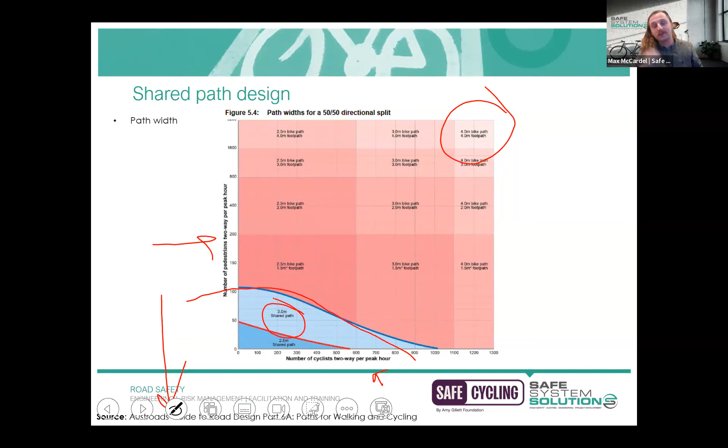Another way shared path width is often calculated - you may have come across this - is both within the Austroads design guides and a range of supplements for jurisdictions that recreate this. I should point out that because we have multiple jurisdictions in this course, we're not just focused on Victoria, Queensland or Western Australia. We've looked at the various supplements and additional guidance in each state, and taken snips from different jurisdictions, so you'll see how different jurisdictions manage things and what we'd consider best practice in that space - how others are managing certain aspects of the network.

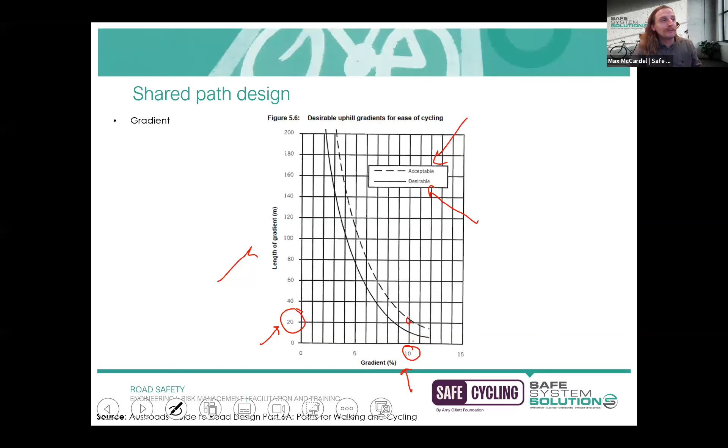Okay, fantastic, I can see lots of, yep, maximum speed, absolutely, no signage, give way, the conflict point right there at the bottom, handrails on the fence, absolutely. Oh, Julian's on, hello Julian.

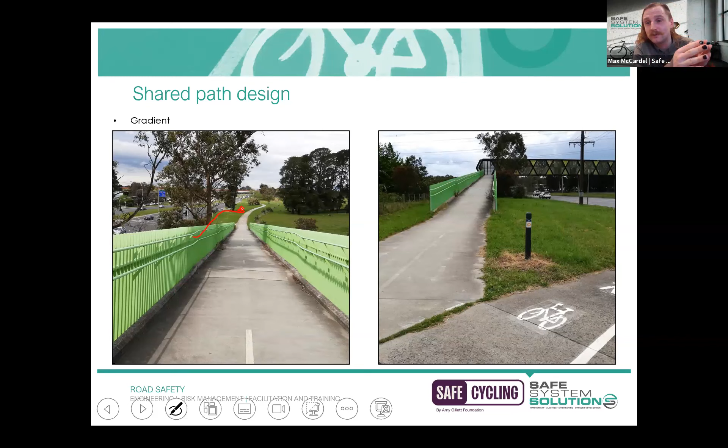We actually did an audit of this design and suggested we put the conflict point over here instead, where it's a lot clearer to see any other cyclists traveling in that adjacent trail, and also provide give way signage and things like that. That has since been installed. So something to consider, the Austroads guidance generally talks about the uphill grade, but also think about how cyclists are traveling downhill, and whether there are any obstructions or concerns during that downhill transition.

All right, when we talk about hazards on bicycle paths, the first thing we consider is, well, what is the operating width of our cyclist? We use a nice neat number of 1 meter. That's generally considered the operating width, the same terminology used for vehicles as well as heavy vehicles, that operating width being how much space they require. Cyclists have their own operating width, so we use 1 meter.

There is a little clause within Austroads which suggests if cyclists are traveling uphill, that operating width may actually be required to be widened. The reason being, cyclists traveling uphill tend to rock left and right, left and right, and that obviously increases that envelope. So whilst not specified just yet, I'd expect in the next revision of Austroads and additional supplements that we may see changes to that operating width. But for the time being, this 1 meter width is generally taken as the standard or the norm.

Importantly, we've got a head clearance that we need to be mindful of. We want to make sure cyclists have adequate clearance if they're going under underpasses, for instance, so they're not going to clip their heads. The height of a cyclist is taken as 2.2 meters, with a 200 mil head clearance, which is not a lot. But often if you are working within an underpass space, it can be a lot of money to dig further down or ensure that the superstructure is higher. So you may be bound by what is currently there, but those are the figures that are currently provided.

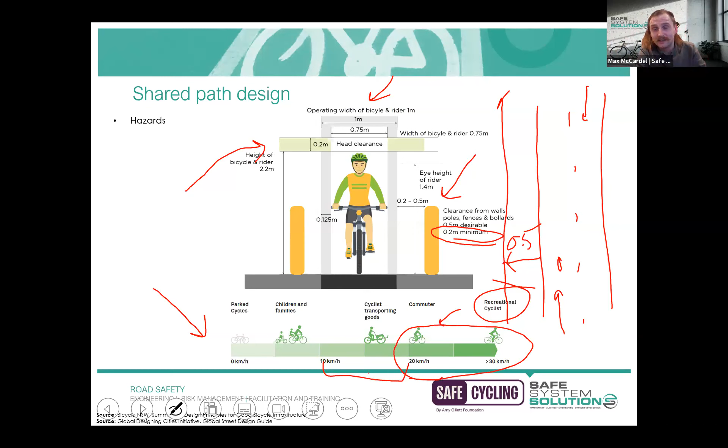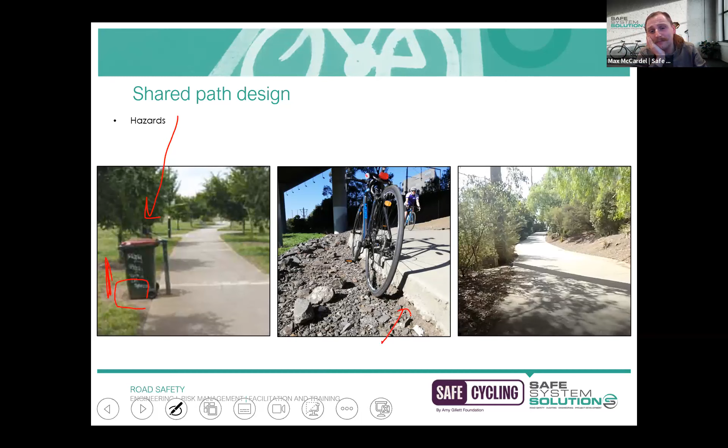Having little drop-offs adjacent to a shared path is also quite common. The way you'd mitigate that is you just want to ensure that whatever fill material you're using, you're battering all the way up to the surface level, not to the underside of the concrete shared path there.

The final example I've got here is a utility pole that's actually very well hidden by the vegetation there. The edge of the shared path is a bit difficult to see, but it runs about there. It's definitely within that half meter clearance, which means this does pose a risk for cyclists. Your handlebars could snag on that, and that risk is also accentuated due to that vegetation having a masking effect, not giving clear visibility to that hazard.

Loretta: Thanks, Max. I've just got a couple of questions that have come through. Go for it. Are we beginning to consider wider operating widths for other types of active transport vehicles like trikes?

Yeah, it's a good question. Within the Global Designing Cities Initiative that I mentioned, I'm almost certain it's in that research document - hopefully I'm correct - there is a whole raft of different cyclist users. So tricycles, cargo bikes, e-bikes, recumbent bicycles, things like that, and it shows what their operating widths are. There has not been an update to that 1 meter operating width that I showed before, but I would expect, as we are now getting a more diverse range of what constitutes a bicycle and who's using those paths, that those operating widths may change. So good question, thank you.

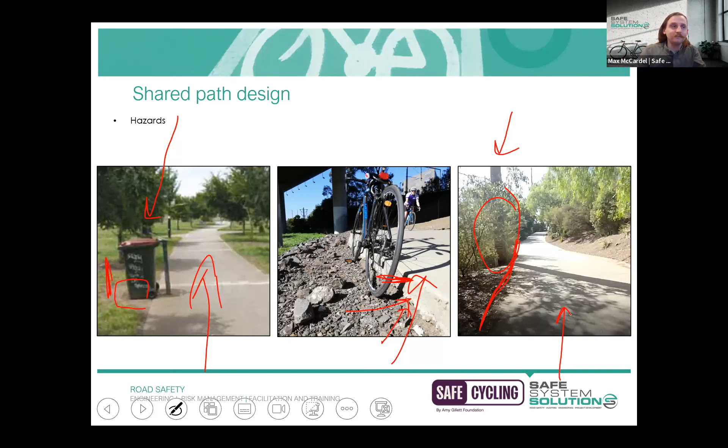Ultimately these things should be seen as a supporting type of treatment, it doesn't remove the risk, it's just trying to make it more pronounced. We should really be picking things up like this at the design stage and instead say, I'm going to move this hazard further into the batter, build a little retaining wall, and that ensures I can continue my shared path width all the way through. Then I don't have to worry about it at all, because while paddles do a relatively good job delineating the hazard, it's much better practice to remove that hazard altogether.

Loretta, back for more. Back for more questions.

What is the minimum clearance required when the shared path is situated at VicRoads' road shoulder or behind curb? Sorry, do you mind repeating that? Sure, so what is the minimum clearance required when the shared path is situated at VicRoads' road shoulder or behind curb? Okay, so it could be an example of this.

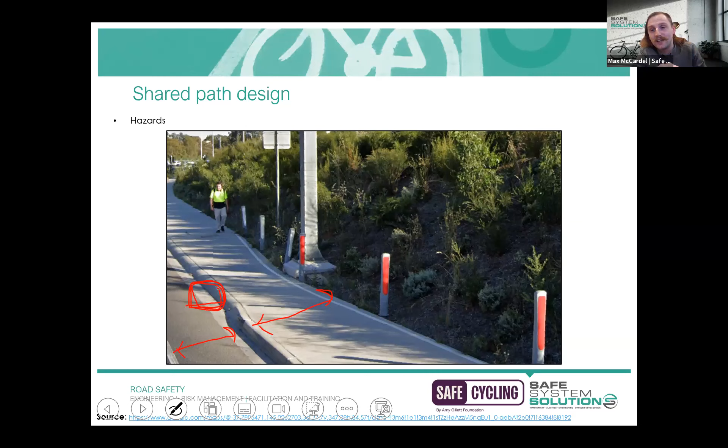So this is like a little shoulder here, and the shared path belongs here. There are examples of there being, I'd say, 300 mil of clearance between there. Basically the further you can put it away would be best practice, but 300 mil is the smallest I've seen. I'm not aware of any design guidance or technical note suggesting it has to be a specific amount. You just want to ensure there's a degree of separation, which we talk about in our next module, whether it's a type of curb, concrete infill, a paddle, or some type of separator to ensure errant vehicles aren't going to stray into the shared path's space or any cycling facility there.

All right, next I'll go into our sight lines. I like to include these calculations to show that cyclists get their own specific calculations. For those that have done sightline calculations for general traffic, like stopping sight distance or approach sight distance, well, cyclists have got their own as well, which is pretty jazzy.

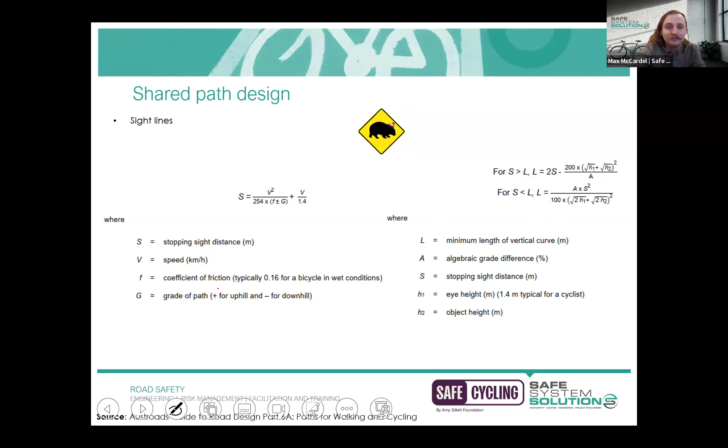If you don't work within this space, please don't fret about all these numbers, it's nothing you'll be tested on. It's just more for those that do these calculations to be mindful that cyclists have their own requirements. So it's a very similar calculation to the previous sight line calcs I mentioned, but you've got your stopping sight distance, speed, coefficient of friction, which generally you take as worst case scenario, so you'd assume a wet condition, and then the grade of the path.

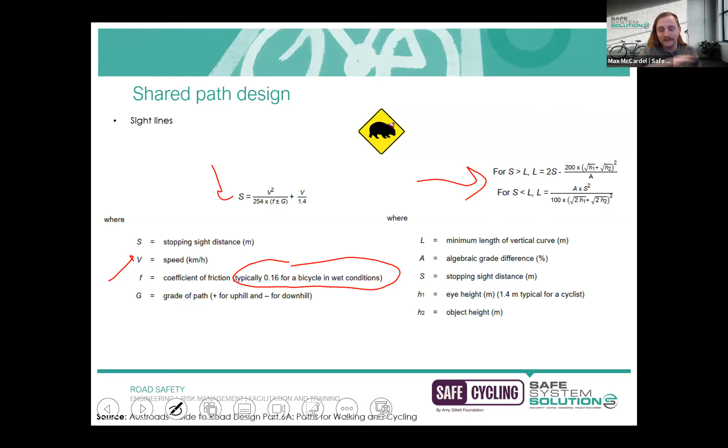And then you can do further calculations just to check if certain hazards on that path will be visible to a cyclist, and this has to do with the horizontal sight lines. But to show you what that means in practice: if a cyclist was traveling on a shared path, and it's got this kind of bend in the path, there may be some side obstructions, in this case it's vegetation.

You've got to do these calculations to ensure that if there was an object or a hazard situated on their travel path, that they have adequate sight distance to be able to safely slow down, maneuver around that, and stop. So that's what that calculation is used for. That's the horizontal sight line calculation.

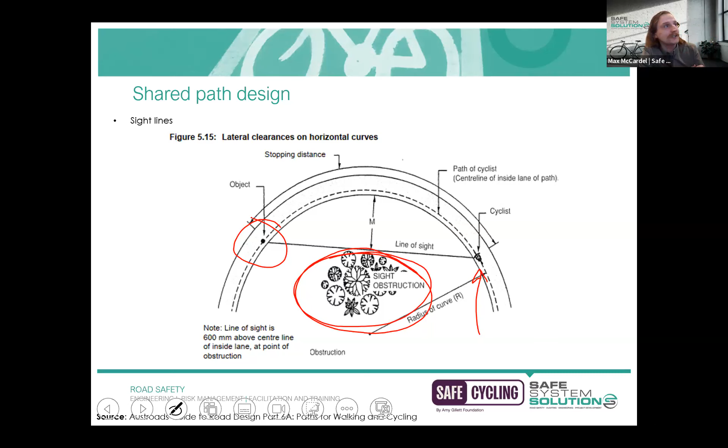This is a real example of that scenario. Believe it or not, this is a shared path, and it is sealed, it may look like gravel, but it is sealed. So you can pick up relatively high speeds going around here. And because of this vegetation, if something was situated on the path, you wouldn't be able to see it.

A hazard could be a cyclist that's fallen down and is blocking the path, or a branch that's fallen over the shared path, or a water hazard. It's important that cyclists are able to safely slow, stop, and maneuver around any hazards on their path. So in this instance, what was recommended is trimming back the vegetation to open up the sight lines.

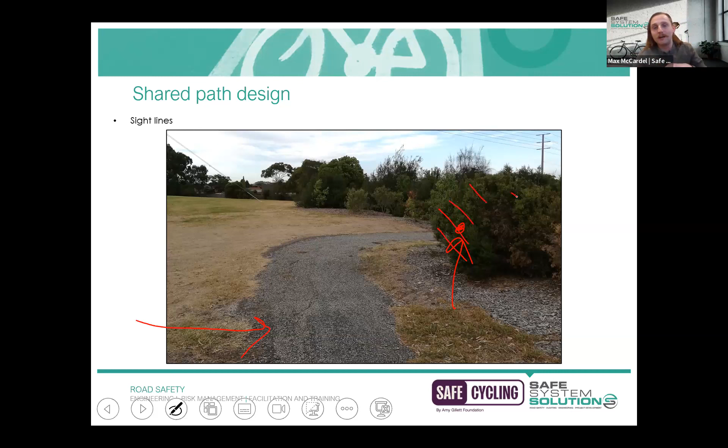Fencing - this is a really interesting topic. There are specific tables to suggest when and where to implement fencing, with two kinds of conditions. The left-hand side is when we've got a vertical drop adjacent to the shared path. The things we're most concerned about are X, our distance from the edge of the shared path, and Y, the height of that drop. A fence is not required if X is less than 2 and Y is less than 250 mil.

You'll see there's a little asterisk there. The reason being, if X is less than 1 and Y is less than 250 mil, or 0.25, instead we want to be battering off the surface - ensuring your surrounding fill is used to batter up to that surface so you've got a nice smooth gradient. That's a better outcome than putting in a fence.

There's also talk of a partial barrier fence required if you've got a drop between 250 mil to 2 meters, which is huge, and a full barrier fence for drops greater than 2 meters, a really significant fall. I'll show you examples of what those partial and full barrier fences mean. In my personal opinion, I think it's overcomplicating things to have these two separate categories, but this is what's currently in our guidance, so this is what we reference.

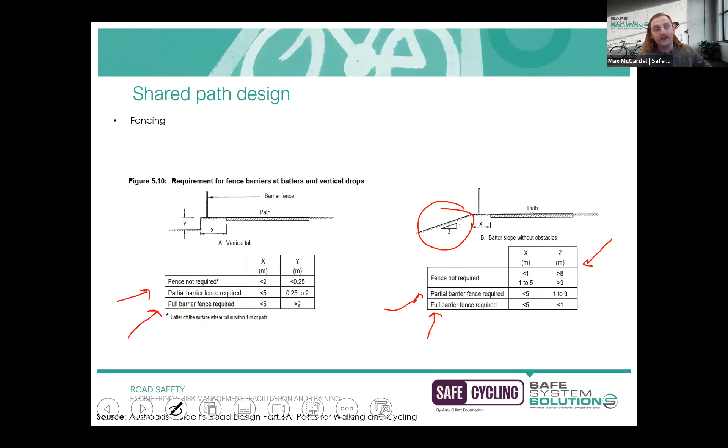The top image on this slide is a partial barrier fence, and the bottom image is our full barrier fence. The difference between the two is the full one has vertical members all the way through it, so it's physically impossible to fit a cyclist through there. Theoretically, a cyclist could fit through the partial one, particularly if they were a young cyclist. As I said, I think this is overly complicated, but those are the two different thresholds we use for fencing.

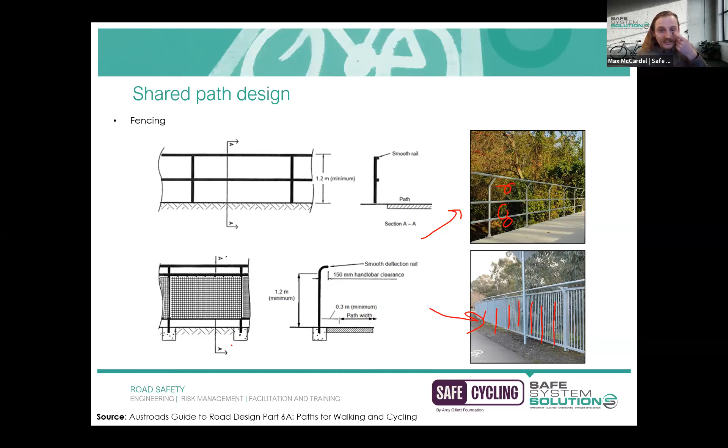The most important thing I'd like you all to take from this is the smooth deflection rail shown on both of them - you can see this rail here and this rail here, also shown in the cross-section view. It's deliberately situated at a height where, if a cyclist is on their bicycle, it's between their wrist and their shoulder.

So if a cyclist were running off the path, part of their body makes connection with the fence, not their handlebar. Because if their handlebar were to collide with those vertical members, that's a massive snagging risk, and cyclists are very likely to topple over and potentially fall over the fence. Instead, there's this smooth deflection rail, sometimes referred to as cycle-friendly fencing, to ensure the person's upper arm makes contact with it - they're much more likely to stay on their bicycle.

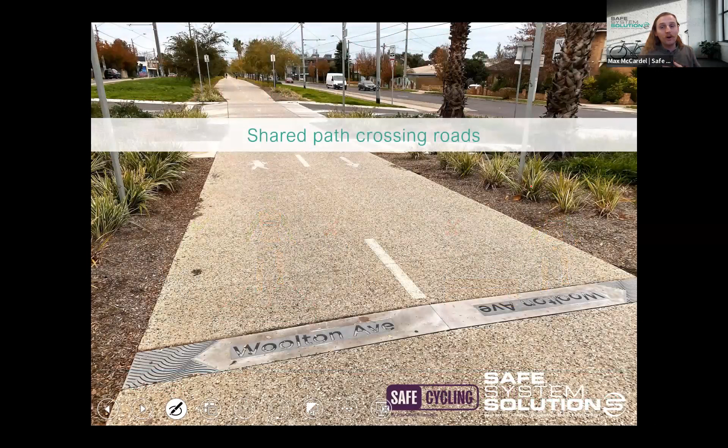This one is: should fencing be installed along the shared path? This is a real shared path that we've got here, and I'll just draw it out so everyone's clear. Should we be doing a fence at this location? I'll give you 30 seconds to fill that one out.

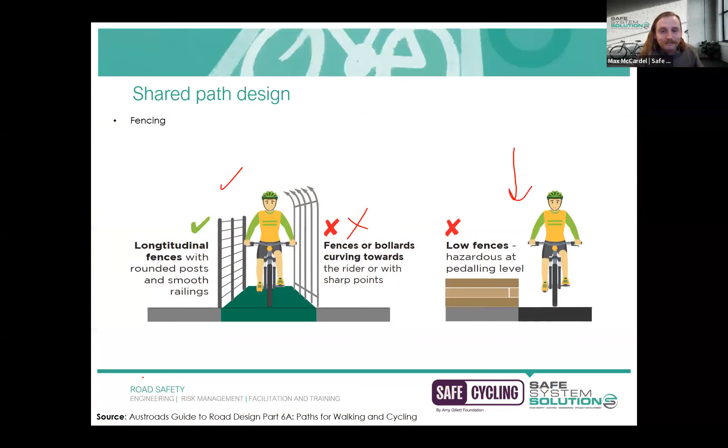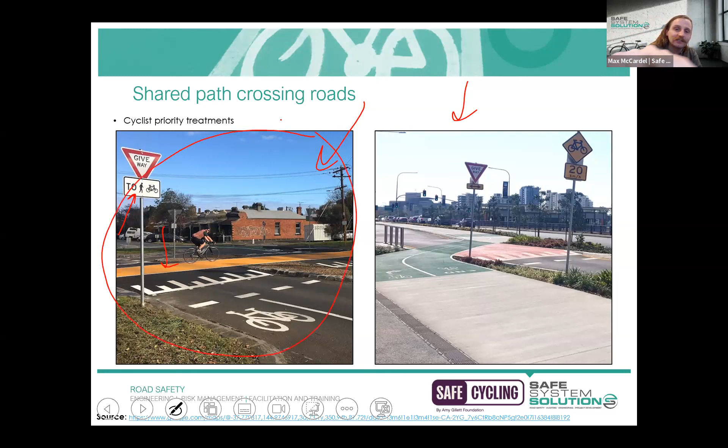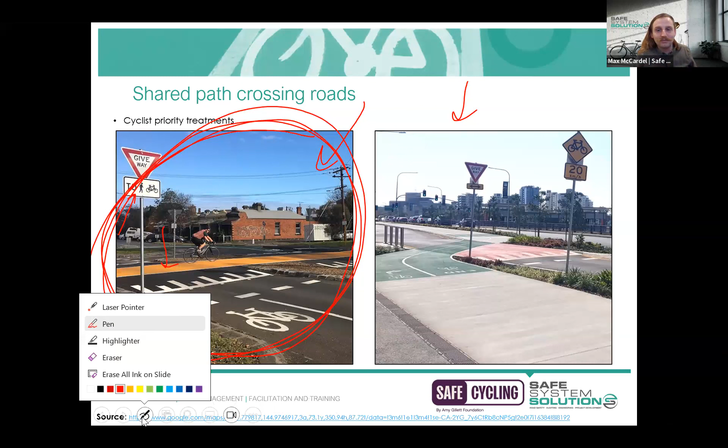Now, I'll open this one up to the chat and mention that my preferred crossing point out of these two examples is this one on the left. Anyone in the chat want to suggest why I would be circling the left-hand side one as my preferred design configuration as opposed to the right-hand side? I might have been too quick on the previous one, so I'll give you a minute to answer this one.

All right. Love seeing all these answers coming through. Thanks very much. And I'm certainly seeing lots of similar answers, being the sight line, which I certainly agree with.

A few points there about the difference in the way that it's actually set up with the signs and the coloured treatments. In a perfect world, every state and jurisdiction would make sure that all of these look the exact same. I don't really think there's a significant difference between making this yellow or making that green or red. Happy to be corrected, but my opinion is, if it's coloured, it's coloured, and as long as it's consistent, that's the most important thing.

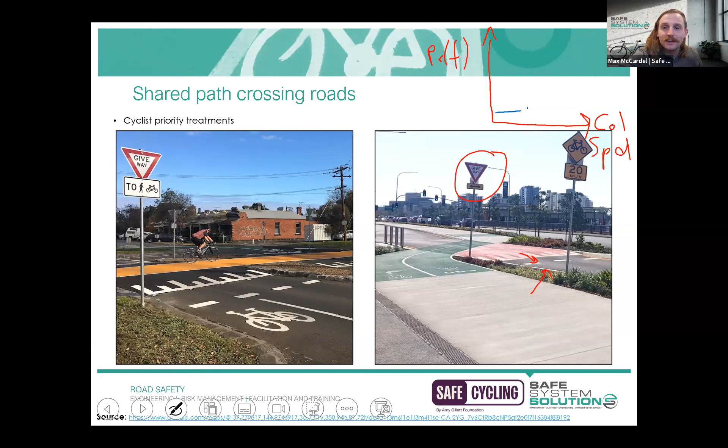If I had this type of graph set up, the way the curve looks is something like this. I may have dramatized that a little bit, but you can see roughly around this point here, things get exponentially worse for a cyclist's ability to walk away from that accident, or not be killed. The speed at which that happens is 30 kilometers per hour.

So when we have any conflict points where a shared path is crossing over a carriageway, if we can manage speeds to 30 kilometers per hour or below, we have a much better chance of reducing the likelihood of a fatal cyclist crash occurring there. That's what we're aiming for. That should be underpinning our decision making, trying to bring speeds down to that 30 kilometer per hour mark or below where that conflict exists.

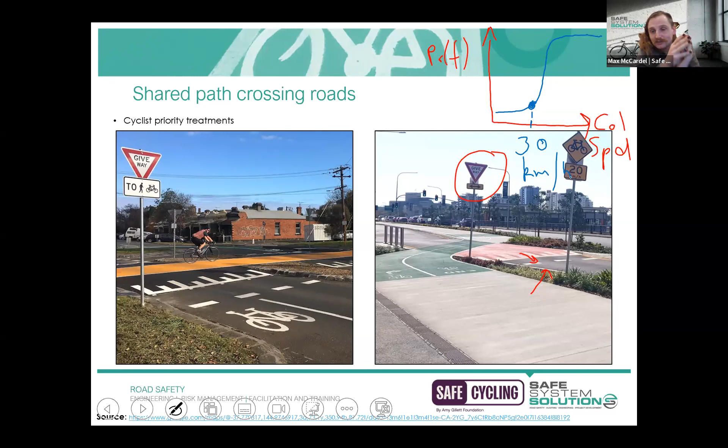Generally that's achieved by providing these raised platforms. This is actually what it looks like out on the ground. You may notice there seems to be a relatively high amount of cyclist skid marks there, potentially cyclists just slamming on the brakes at the last moment because they realize the vehicle is actually heading straight on through. They're not yielding, they're not giving way. You've got all these examples of that kind of activity.

So if you're able to provide crossing points perpendicular, where you're maximizing that sight distance, it's a really great outcome. I appreciate for this particular site, with the constraints you're working with, it can be difficult to achieve that. But as a general rule of thumb, it's much easier for cyclists to safely pass through those environments where they are perpendicular crossing points.

Okay, some bollards now. So lots of different bollards that we have around our networks, and these are just a few select ones that I wanted to include in the presentation. The one on the left here is actually in Byron Bay.

Now, obviously the intent of bollards is to ensure that there's no vehicle egress, so vehicles can't access the shared path. Every now and then they're also installed to ensure that dirt bikes, motorbikes, kids with monkey bikes, that kind of thing, are deterred from access.

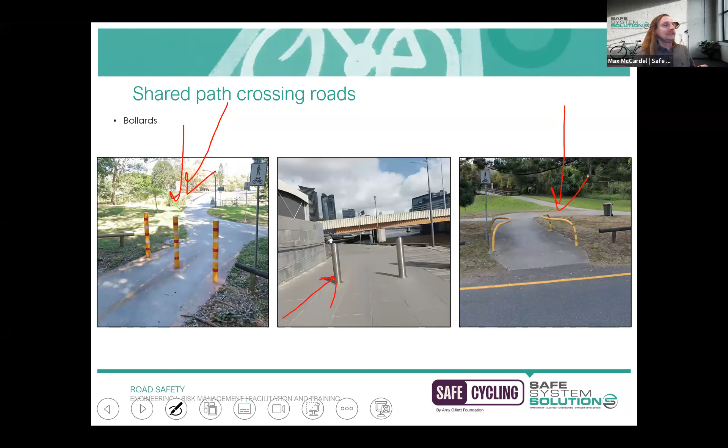It's not uncommon to see this type of arrangement, though, where cyclists that have longer operating areas - think cargo bikes, or if you've got a bike and a trailer for your kids out the back, or your shopping, or your dog in the trailer at the back, whatever it is - sometimes those chicane treatments can be too tight for them to actually maneuver. So that's something also to consider.

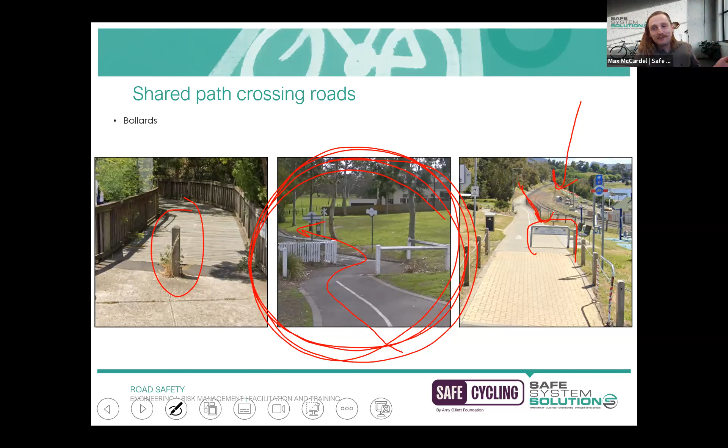This last example is in Tasmania, where you've just got this U type of bollard that's being used to prevent access. But once again, if you think of it more philosophically, this is literally a cyclist's travel path, going down the hill, and you've just placed a massive hazard right in the middle of their lane. That would never happen in a traffic lane, but we're kind of willing to accept it for cyclists.

So you might be questioning, well, what can we possibly do within this space instead? But before I get to that, I did want to just share, I suppose, a reminder of why I'm talking about this.

This is a bollard that was erected on the Upfield bike path in Brunswick or Coburg, I think it was - sorry, in Melbourne. And that's how it kind of looked. You can see it's certainly been struck many, many times, and doesn't do a great job of standing out, or just looks like it's been through the wars a little bit.

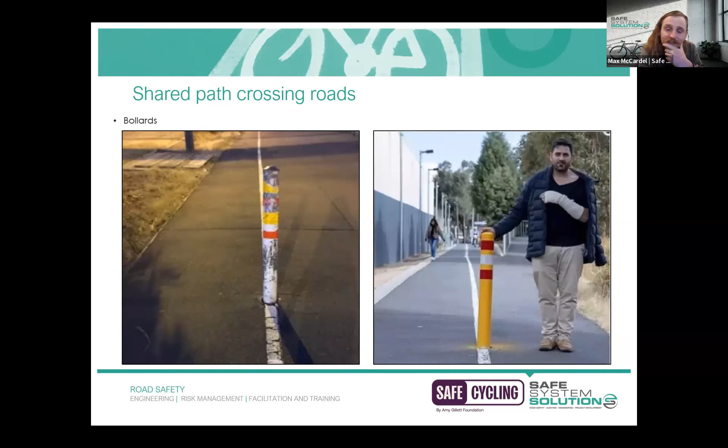This fellow here was unlucky enough to strike that on his commute home. He rode into it as it was looking like that. He broke his wrist, broke his arm in 3 places, and had some facial injuries as well. He had to call an ambulance to come and get him, and while waiting for the ambulance, he saw 2 other riders hit that same bollard - within the space of 40 minutes or whatever it was. The 2 other cyclists had minor injuries.

They never get reported. We know that cyclists' injuries, particularly with bollards and any of these hazards, are incredibly underreported. They don't know who to tell, where the issue is, or they can't be bothered, so they just cycle off and that's it. They might have damage to their bike, minor sprains or grazes or things like that, or potentially just a bruised ego. But it is a lot more common than you would expect.

This fellow complained to council and decided to get his legal team involved, saying you can't just be putting bollards in the middle of my path - that's wacky. So he decided to sue council. Council went out the next couple of days and decided to give it a coat of paint and some fresh tape. So it's certainly more visible, but the hazard still exists there.

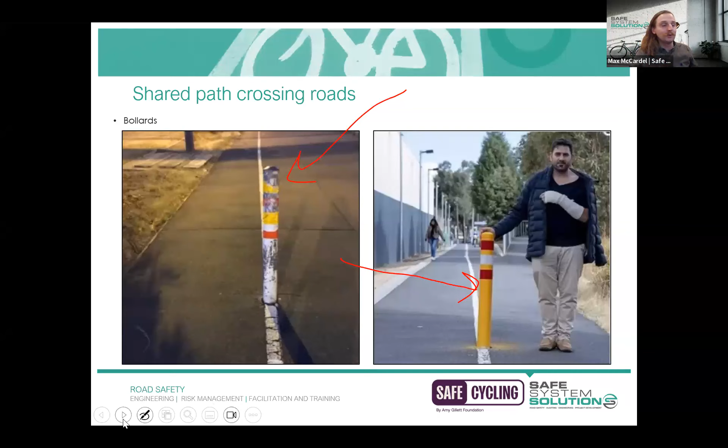All right, so what can we do instead where we do have shared paths crossing roads? How can we prevent vehicle access there?

What I would consider a better outcome is, the way that I visualize this is, for those who are within the traffic engineering or road transport space, think of a splitter island. This is just a splitter island for cyclists. And instead of actually using a concrete or curb arrangement - you could use that by all means - but you could also just use vegetation.

That would help separate the two opposing streams - we've got egress going one way and access going the other. The vegetation itself would likely act as a deterrent for any vehicles to access that space. If it's above 200 mil or high, then it's unlikely that vehicles would be able to drive over it. Perhaps they could, but what are the odds they'd actually do that? So I consider this a much better way to mitigate the risk of vehicle access, rather than just providing a big hazard at the end of shared path facilities.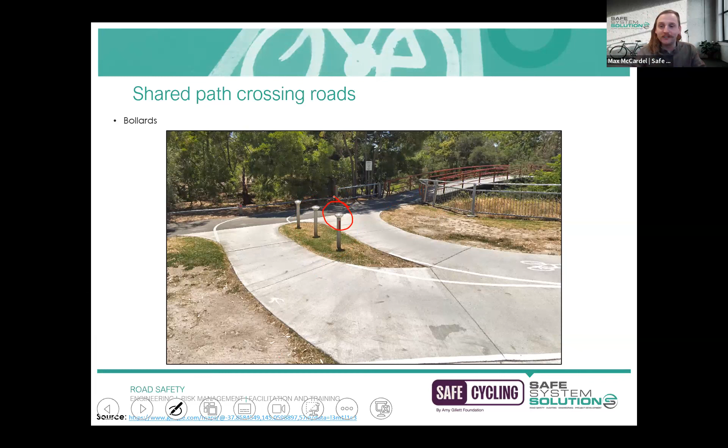The other thing I wanted to mention is DDA requirements. Although we're talking about shared paths and thinking about cyclists and how they're connecting across roads, it's still a requirement for TGSIs, tactile ground surface indicators, to be installed on that shared path. You still need to adhere to your DDA, Disability Discrimination Act, to ensure that people with vision impairments or the blind are able to acknowledge that they're about to cross a carriageway. So you still need to provide that provision.

I've had cyclists and others in this course ask what are the implications of cycling across the TGSI - for those not familiar, that's like the little braille that's on the ground there. Anecdotally, personally, I've got no issue with cycling across those. I haven't really experienced issues with skidding or anything like that. If it's physically lifting because it's a defect, that's a different question, but in terms of the material itself, I think it's not really an issue at all.

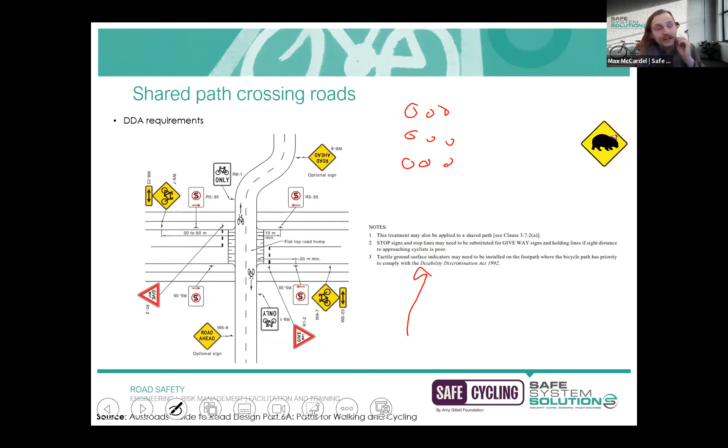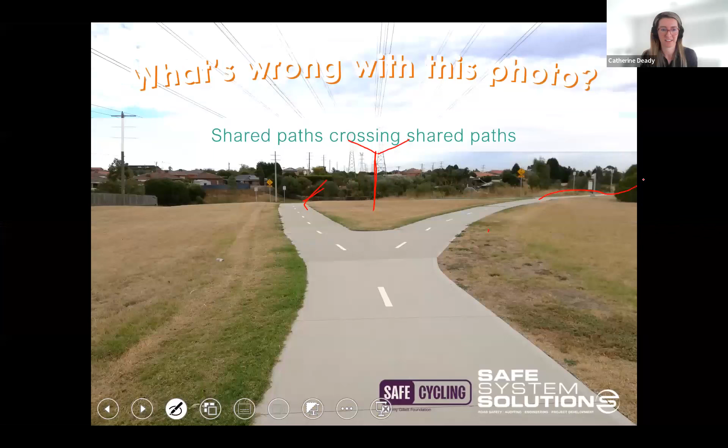From memory, though, I do believe that they kind of did link to other shared paths. They crossed over a road there. Or maybe that one crossed over a road and this one just went another direction - I'm not too sure, I can't remember. Thanks, Max. No worries.

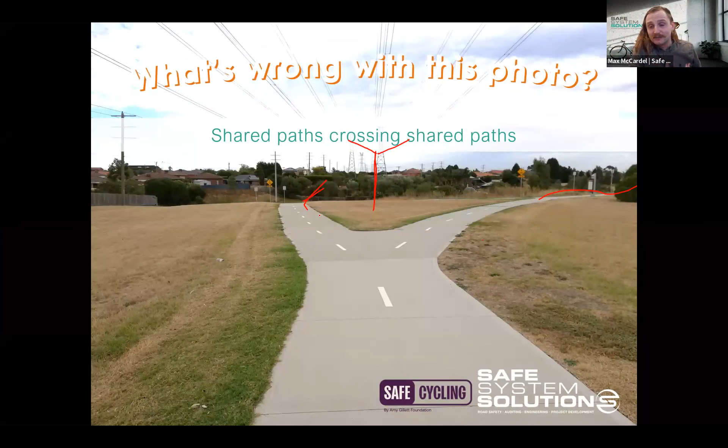But this wayfinding signage, it is often an afterthought when you're going through the design process. And it really does improve the attractiveness of a facility, just makes it more connected, easier for cyclists to experience that.

It's so important that Austroads actually released an entire research report on bicycle wayfinding, because so many jurisdictions do this different ways, and not just state jurisdictions, but individual LGAs may have their own way of mapping out their cycling routes. Once again, I'm personally a fan of - we're kind of one country. Ideally, no matter where you are, you'd be seeing similar signs and similar fonts and similar colors and all those kind of things, but we're certainly not there at a national level.

I'd like to see that at least at a state level - that would be fantastic. But some general principles that you can glean out of this document would be: wherever you are along the routes, the signage should be consistent. So even if you were crossing over LGA boundaries, you would like to think that if you're on a particular trail that's meandering along a creek or something like that, the way that information is communicated to cyclists is consistent - same colors, same fonts.

If you're using, for instance, a number - this is number 15 trail - the number 15 trail goes from the train station all the way to the Esplanade or something like that. Then all junctions have that number 15, and it says left to the Esplanade, right to the library. Having that consistency all the way through just gives cyclists confidence that they're on the right route, and they're not going to end up somewhere where they didn't expect.

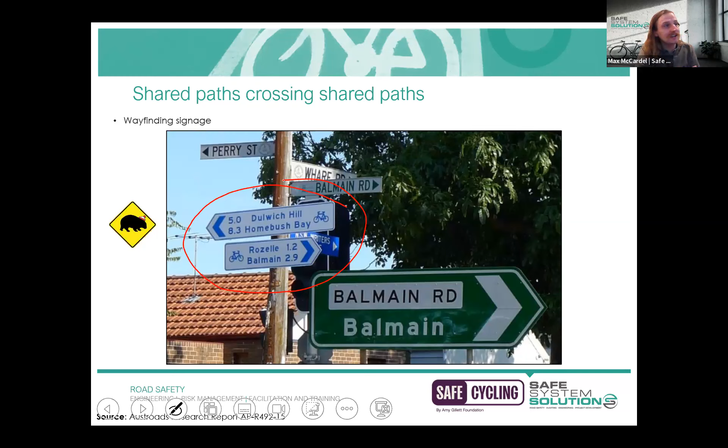If you've ever had the privilege of cycling in countries like Denmark or the Netherlands, they take this stuff really seriously. It's wayfinding, not an afterthought by any means. They really consider how cyclists experience their networks. It's really common to have route numbering, as I suggested before. So route number 2 would get me to the town centre, and you just need to look out for the number 2. You don't need to worry about translating things - luckily numbers are universal, so we can just follow number 2.

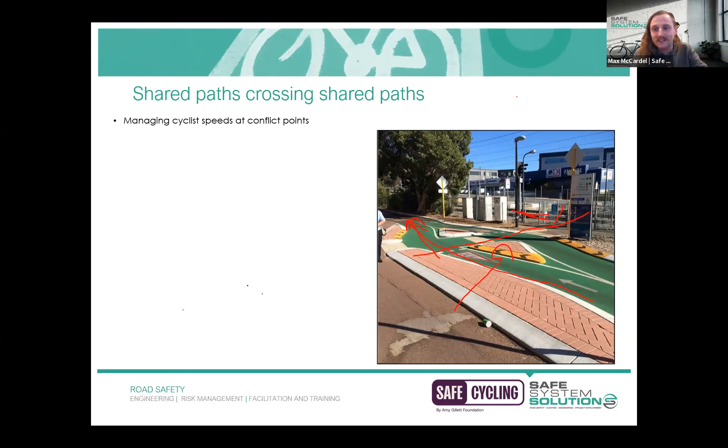Super busy train station adjacent here, so you can kind of see the rail is just there. What happens is cyclists may be traveling to the train station, but once these gates open, you've got this flood of people also traveling up along the shared path here. So you've got this massive hive of activity with cyclists and pedestrians all using that space. So how do we manage that?

Well, what's being used here is you can see lots of color - they've used the green color here, and the splitter islands just so cyclists are aware there's something changing. They've also implemented the little give way symbol on the shared path itself, just to say that you've got to give way here. It's pretty cool.

I've got to say, I don't have another example of this kind of treatment implemented - there might be another one along this trail here, actually, but it's good thinking, just applying those traffic engineering principles. What kind of works for general traffic? Cyclists can, to an extent, be seen as just a smaller version of a vehicle with their own lanes, so theoretically it should also work. It's a really cool example of just trying to slow down cyclist speeds and ensure they're giving way to pedestrians within that space.

Loretta - someone's just mentioned, should there be a zebra crossing to use more commonly understood road marking? Great question, let's give a prize out there too, and I was actually going to mention that. Another way we could have potentially managed this example would be similar to how I was really emphasizing how good it is for raised crossing points where cyclists are crossing a carriageway.

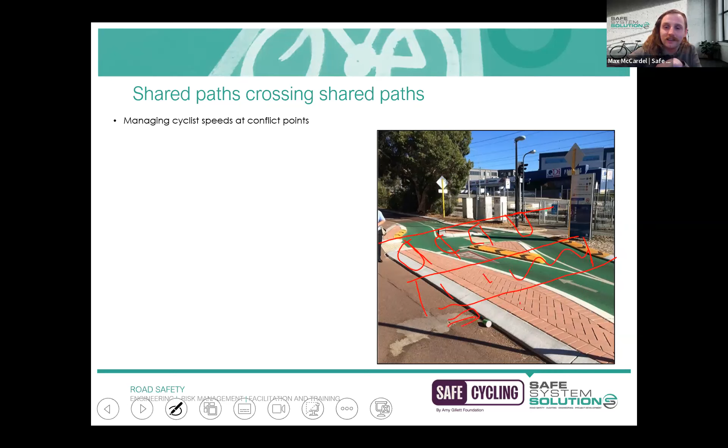So cyclists are physically slowed down by that vertical deflection, by the grade of the ramp. And as suggested in the comments, it's a lot clearer that, okay, I need to slow down, this is a pedestrian zone, I need to give way to pedestrians. I definitely agree that those zebra crossing markings are much more intuitive and well understood by the community, that it's not my space as a cyclist to just charge on through. I need to really slow down and manage my speed. So yeah, I agree with that suggestion.

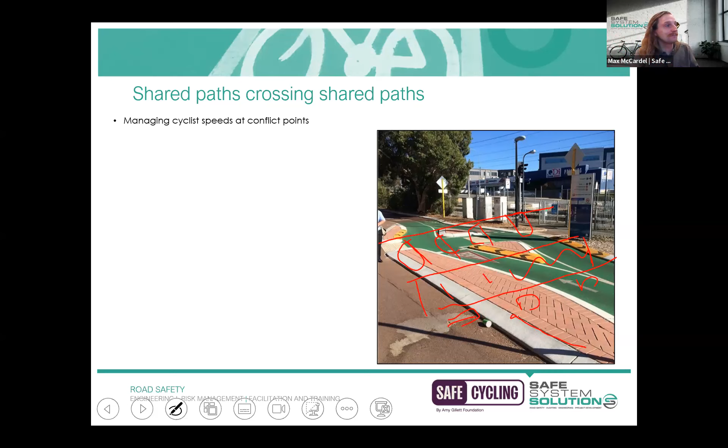Another way we can see things managed in these locations is just by pavement markings, where you have pedestrians crossing over shared paths. Do I think these add a significant benefit? Not really, I think it just seems to be doing something. Often on shared trails or shared paths, these stencils might be, I don't know, 450 mil square. By the time you see them, you could already be right on top of them, so you might not even read the text 'slow down'. I don't really see those kind of pavement markings as offering a significant safety benefit.

Catherine: Just on that one again, Max, good point raised that with zebra line markings here in Victoria, and I believe in Australia, cyclists have to legally dismount. So that could potentially be problematic if that was used in this instance.

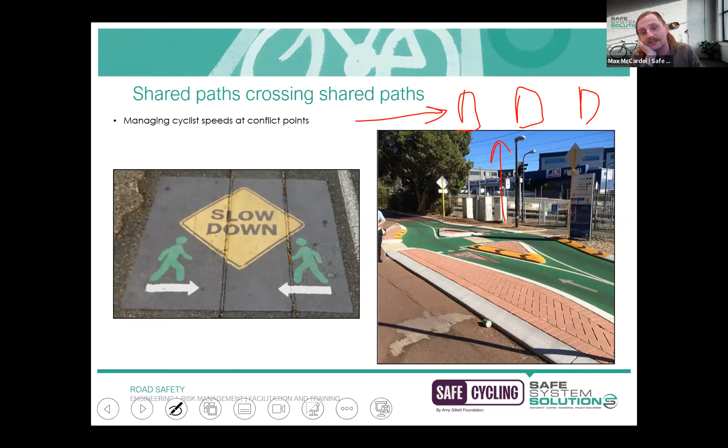Okay, so they're certainly not allowed to ride like in that direction. I actually don't know, yeah. Might require someone with a bit more legal savvy than myself, but I certainly know in Victoria you're not allowed to ride across zebra crossings parallel, but perpendicular I don't think so -- surely you wouldn't be expected to dismount, because think of a wombat crossing or something like that in a mid-block section. It must only be parallel. Yeah, good test though, good test. Making me think on my feet.

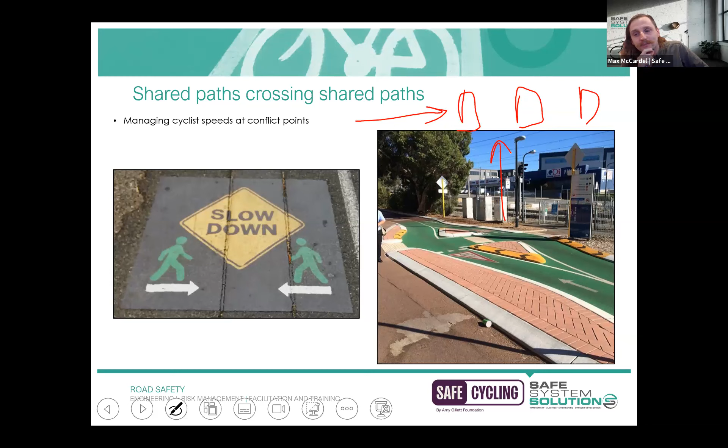Yeah, sure. I guess the other thing, I don't know if they've used it here, is just the rumble strips prior to the crossing point. Yes, I actually might include that as an example in the next module, just so we can have a bit of a chat about that, because it's worth mentioning as well. So I'll make a note to include that. Thanks, Max. Not a problem.

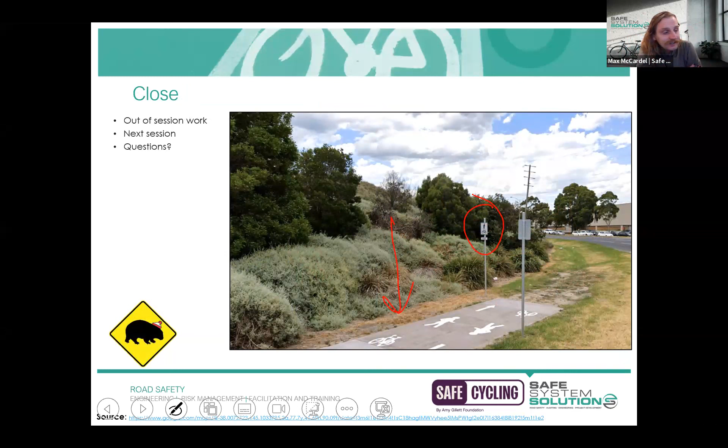That is the end of the module. We do have some time to go through the LMS, which I'll let Loretta get stuck into. But I just wanted to finish on this little note about ending shared path designs. It's not really as simple as just putting up an end sign and saying that's it, job's done. We need to be thinking about the connectivity of the routes -- are we actually providing a sensible end destination? This is an example of one that is failing that.

This is a real example. You can click on the link to have a look at the Google image if you're interested. The reason it likely ended here is because just adjacent this shared path there's a massive multi-lane roundabout, like 3 lanes of traffic on each leg, 60 or 70 kilometers per hour, huge land envelope as well. I could imagine the shared path was stopped here because trying to get through that roundabout would have been pretty difficult to design your way out of. It would have to be some type of grade separation, I'd suggest. So that's how this kind of shared path ending would have developed.

But I think it's a really poor outcome, because invariably cyclists do still have a desire to cross here or continue their journey further up, and this just doesn't provide for that whatsoever. So cyclists may enter that roundabout and just try their luck, which is obviously quite an uncomfortable thing to be suggesting.

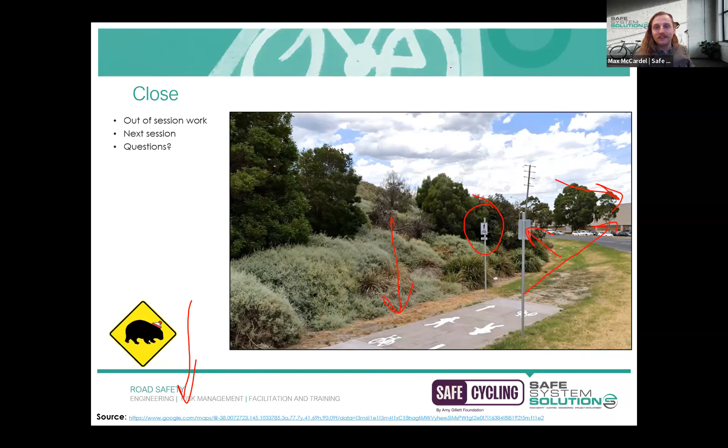Great, thank you. You would have all received an email with a link to the learning management system. If you haven't checked your emails, please check your junk or spam folders, because it often goes into those. If you can't find it, contact us at training@safesystems.com.au, or give us a call and we'll reset it for you. Or you could do it yourself. If you click on 'forgotten your username or password' - your username is simply your email address you registered with - you can reset your password easily as well.

So I'll just log in and show you around the system. You come to the dashboard initially and you'll see how many courses you've been enrolled in or have completed already, since a lot of participants on this webinar today have already completed some courses with us. I'll go to what we're doing today, Safe Cycling Infrastructure for Streets and Roads, and view that course. Then it brings you to this page here.

So the first course is your welcome. On here you can find, again, the link to the webinar. So if on the day of the module you can't find the link in your calendar or emails, you can just click in here and the link is there. Hopefully a few people have introduced themselves here - yeah, I thought so - so just introducing yourself to your fellow participants.